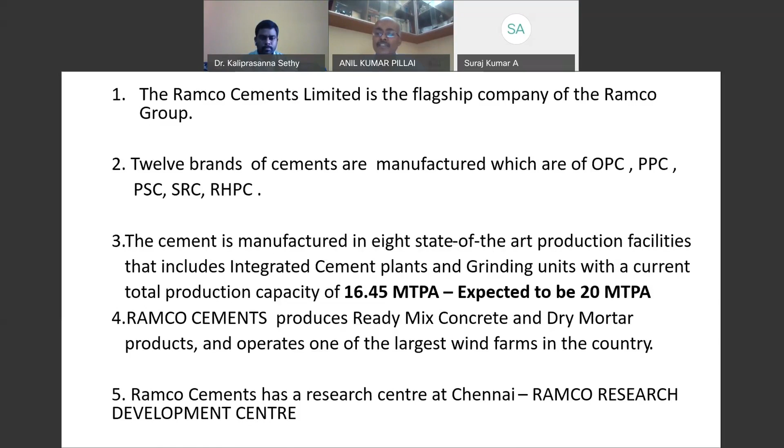So we have these different types of cement. Ordinary Portland cement, we have 4 types of cement. The Infra 43, Infra 53 grade is for those concretes which need longer slump retention time. We have the Super Fast for precast works. We have the PPC cement, Super Grade, Super Crete, Super Fine, Super Plus. Ramco Super Crete is one of those premium blended cements having a high rate of gain of strength as well as low heat of hydration.

We have the Portland Slag Cement, Ramco Super Steel, Ramco Samudra. We have the SRC cement, the Ramco Super Coast. So this is how we have the 12 types of cements which are there.

A wide array of customers that we have, from the individual householders, house builders, to large construction firms, Larsen & Toubro, which engages itself in construction of various types of structures, whether it be bridges, whether it is in the area of ports, and you will find that ITD Cementation also, they are into a lot of infrastructure works. So you will find that in each of these infrastructure works, we have different kinds of requirements. If suppose the durability requirement is for aggressive environment, we have a different type of condition that is there. So the concrete mix design has to be done differently.

When we talk about self-compacting concrete, we need to have a concrete which has to be without vibration. When we have precast concrete, we need to be very thorough on how to make those precast concretes at a plant, and then transport those precast items to the site. So there are so many challenges, so many different varieties of concretes that can be made at different sites based on the customer requirement, based on the aggressive conditions.

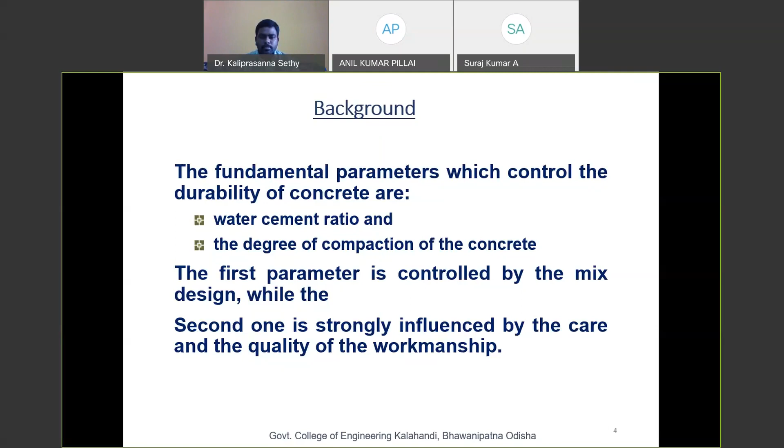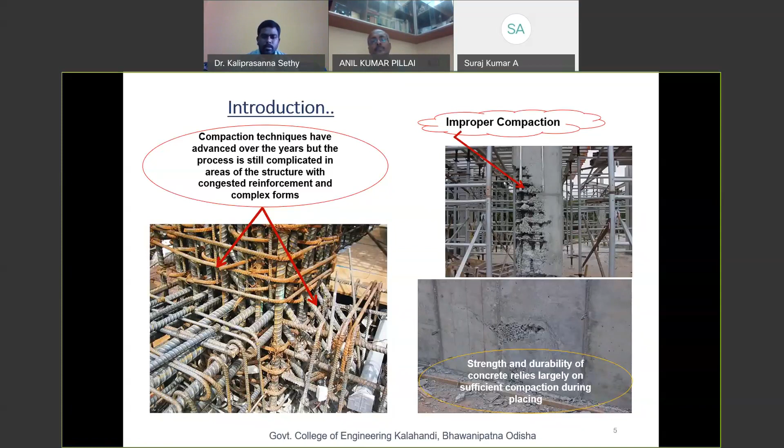So talking about self-compacting concrete, as the name suggests, it should flow under its own weight. In the year 1986, Professor Okamura at the University of Tokyo, Japan, developed this self-compacting concrete in order to satisfy the concerns regarding homogeneity, compaction, overall durability, and the lack of skilled labor. So this is the factor behind the development of self-compacting concrete.

And self-compacting concrete, as you know, is a highly flowable concrete, so it can flow under its own weight and yet is cohesive enough to be handled. And self-compacting concrete maintains its homogeneity without segregation. Though we are making the concrete flowable, there may be a chance of segregation, but we have to take care to avoid segregation.

And self-compacting concrete should be capable of filling every corner of the formwork. It should have very good passing ability, and it should pass along with the coarse aggregates through the reinforcement without blocking and without any external device for compaction.

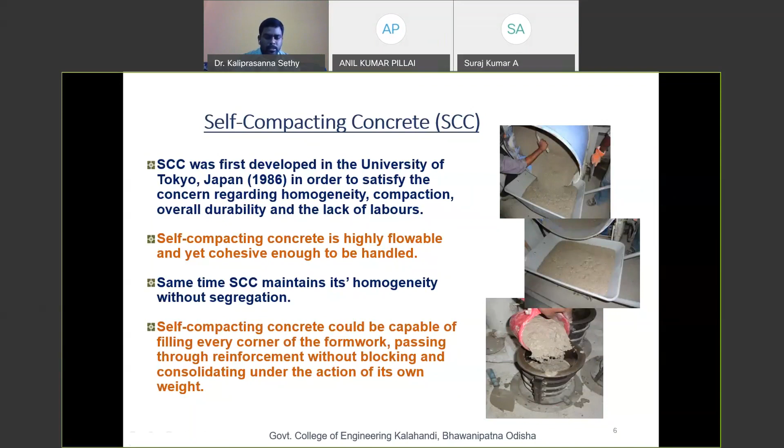And some superiority, I can say, some advantages of this self-compacting concrete over our conventional concretes. So it has faster construction quality, reduction in site manpower, though we need not go to the site with any vibration equipment.

Better surface finishes will be achieved, easier placing, improved durability, reduced noise levels, and a safer working environment, though we are not using any electrical devices for compaction, and reduction in the cost of concrete, though we are adding some external waste materials for the development purpose.

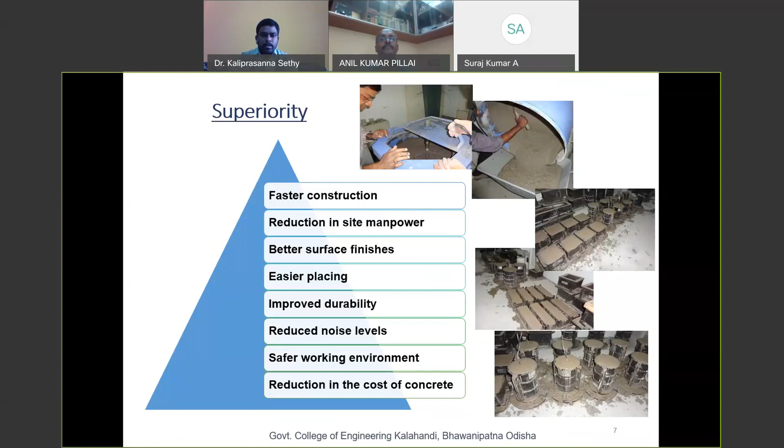And this is the structure mix proportion given by Professor Okamura in the year 2000. So he tried to give a tentative difference between our conventional and self-compacting concrete. As we know, for every design purpose, we have to assume 2% of air void to make the 1 cubic meter of concrete.

So that is there. And talking about water, water is 18% in both the cases, I mean in normal and self-compacting concrete. And in the case of self-compacting concrete it is mentioned as powder, whereas in normal concrete it is mentioned as cement, because we know it is a mixture of cement, sand, coarse aggregate, and water. But in self-compacting concrete we are increasing the powder content to achieve more paste.

So to achieve more paste, we have to increase the amount of cement. But if we increase the amount of cement, we may get a rich mix, and we may increase the cost of the concrete. That's why we try to use waste material, which is industrial slag, for the development purpose. And talking about sand, it is almost similar.

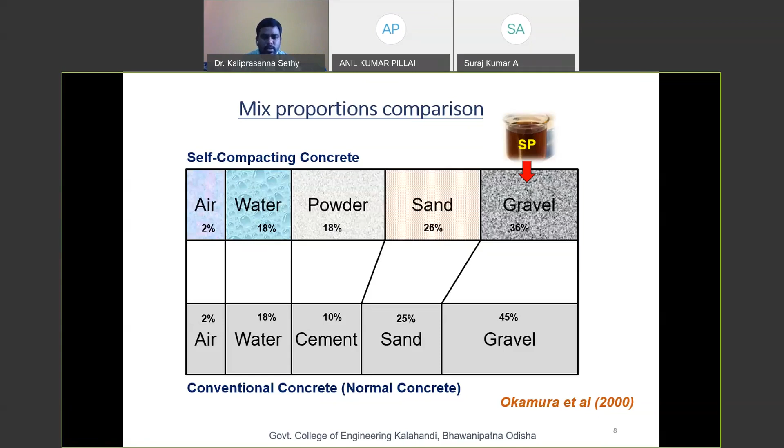And that is the beauty of this self-compacting concrete, you can say. So coming to the next slide. This is a project conducted at our laboratory, and for this project we have set our objectives: to develop a mix design methodology by incorporating slag into self-compacting concrete based on the efficiency concept, and to carry out experimental investigations on self-compacting concrete over the range of strength and percentage replacement levels, and the effectiveness of the proposed methodology in achieving the required strength.

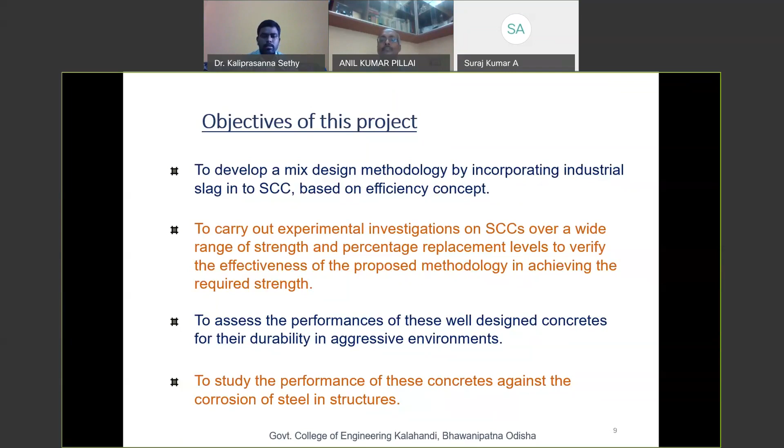The third objective is to assess the performance of these well-designed concretes for their durability in aggressive environments. Fourth, to study the performance of these concretes against the corrosion of steel in structures. With these objectives, we will go towards the materials and mix design methodology.

As we already discussed, we are using industrial slag here. So let me clarify the industrial slag. It is the byproduct from the iron and steel industry. That is granulated blast furnace slag, recovered by melting separation from blast furnaces that produce molten pig iron. Approximately 290 kg per ton of pig iron is generated. So it is available in very huge amounts, freely. So we can utilize this waste for the development purpose without any hesitation.

And you can see the chemical composition of cement and this slag. It contains almost similar silica content as cement, and the Blaine surface area is 370 square meters per kg for cement, whereas the industrial slag we used here has a surface area of 430 square meters per kg. So it is finer than the cement which we have used for the design of self-compacting concrete.

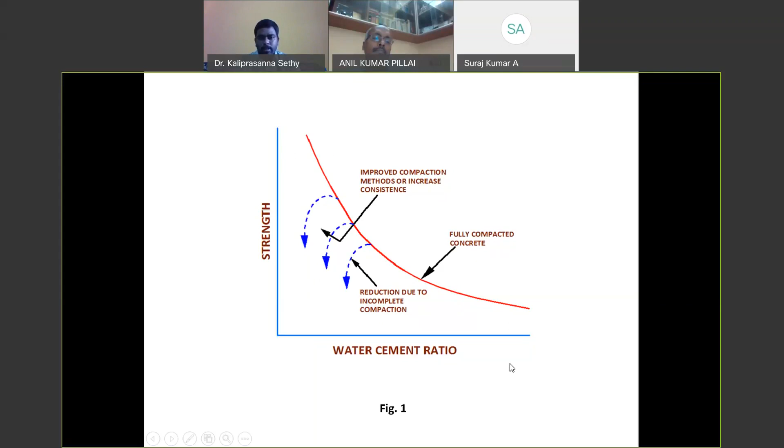But at the time of placing the fresh concrete at the site, in the formwork, if we don't take care of the compaction, it may drastically reduce this. You may not find the curve in this position; it will drop to this position, and the strength and water cement values will be different from what you achieve for fully compacted concrete.

Also, in conventional concrete, the water content is fixed based on the maximum size of aggregate, around 186 for 20 mm aggregate, and aggregate grading. In the case of self-compacting concrete, the total fines, meaning the powder content, is of importance. First we have to fix the powder content, then proceed to the other materials. In view of this, step 1 is fixing the total cementitious or powder content for SCC. We have fixed the total cementitious material at around 550 kg per meter cube.

In the previous slide I had shown you that... I think these switches are not working for my system. Slide is not moving, is it? Slides are moving, but it is not going back. Oh, is it? Uncheck that share content and check it again. So should I stop sharing? Stop sharing and then start sharing again; then it will be all right. Okay, thank you. You want to go back, is it? Yeah, it is fine now. Thank you.

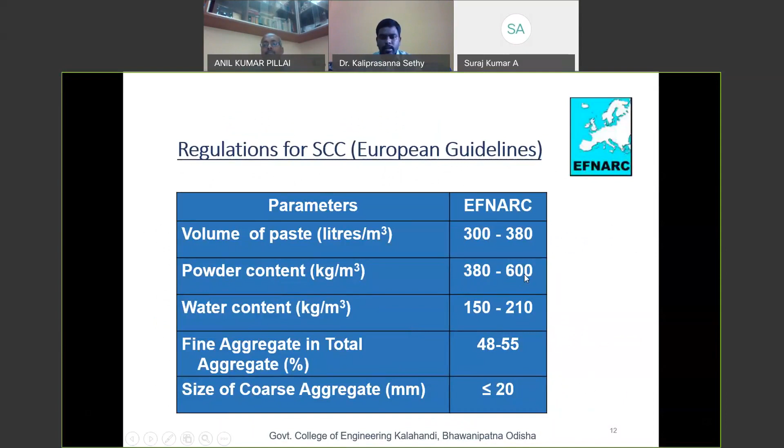From the EFNARC guidelines, the powder content has to be set between 380 and 600. Based on this, we have set our powder content as 550 kg per meter cube, which is why we chose these parameters from the EFNARC guidelines. In the next step, once we fixed our powder content, we fixed the percentage of industrial slag and calculated the efficiency also.

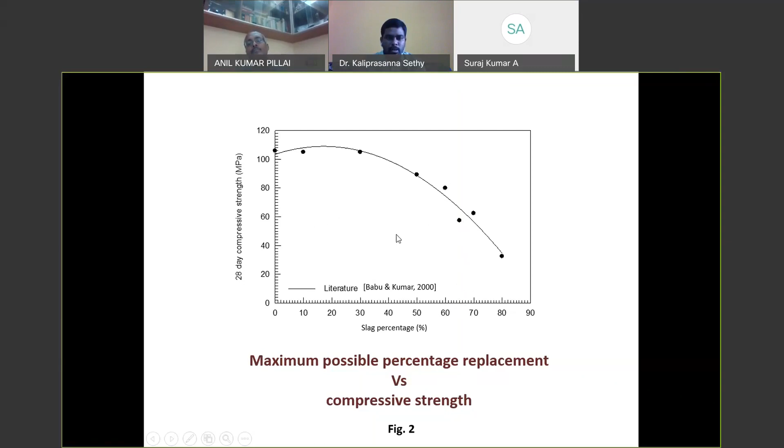From earlier research, it is known that for normal slag concretes, the slag content can be varied from 10 to 80%. Here is the diagram given by Babu and Kumar in the year 2000, plotted between slag percentage and 28-day compressive strength, showing the maximum possible percentage replacement for a given compressive strength. If anybody wants to design an M60 concrete, from this curve you can find the corresponding slag replacement, around 60 to 65%. According to this curve, we set our slag replacement, and for self-compacting concrete the same concept is extended.

Like in this procedure, the 28-day efficiency factor, so I'm talking about efficiency. The efficiency factor, that is the K value, is defined as the portion of the pozzolanic material. The pozzolanic material we are using here is slag. So it is defined as the portion of pozzolanic material like slag or fly ash, etc., that can be considered equivalent to Portland cement. So a value of K equal to 1 indicates that, in terms of compressive strength, the pozzolanic material is equivalent to cement.

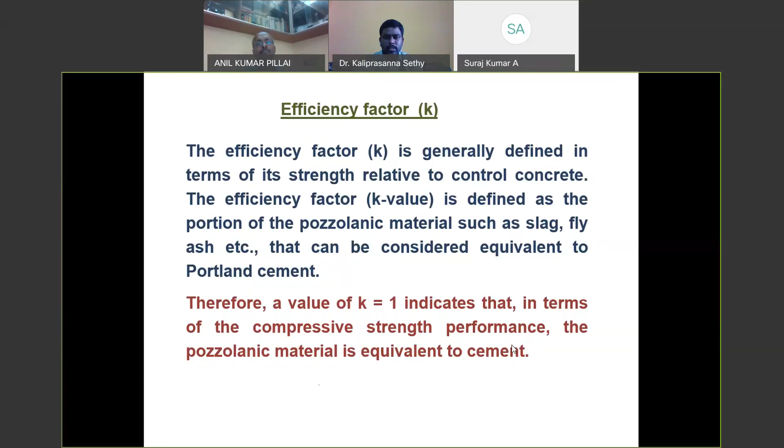So once we fix the slag percentage based on the efficiency method, we go to the third step, that is calculation of water content in self-compacting concrete. The quantity of the slag is multiplied by the K value to estimate the equivalent cement content, using the modified ACI relationship, that is water cement ratio. This is the modified ACI curve plotted between water cement ratio and 28-day compressive strength. In conventional concrete we are using only cement, so it is on water cement ratio.

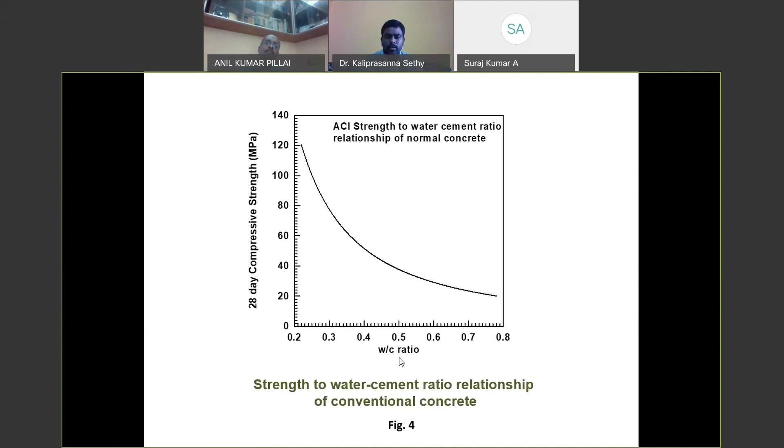But in the case of self-compacting concrete, instead of cement we are using cement plus slag, and with the efficiency factor concept, we have to make the slag equivalent to cement. So here is the formula, W/(C + K×G), where K is the efficiency factor applied to your slag. To make the slag equivalent to cement, we made this, and this is the water cement ratio for our self-compacting concrete.

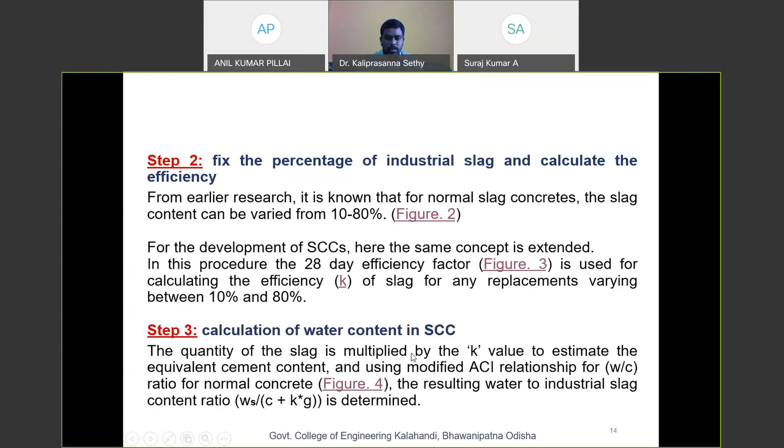And in step 4, we determined the coarse and fine aggregate content. It is now possible to assess the total aggregate content according to the absolute volume method. Like in conventional concrete, the fine aggregate content in the total aggregate is generally recommended to be in the range of 48 to 55%, as already shown in the table. And the proportioning is based on the continuous grading curves. From these grading curves, you can see the gradation of the aggregates we have used for the development of normal and self-compacting concrete.

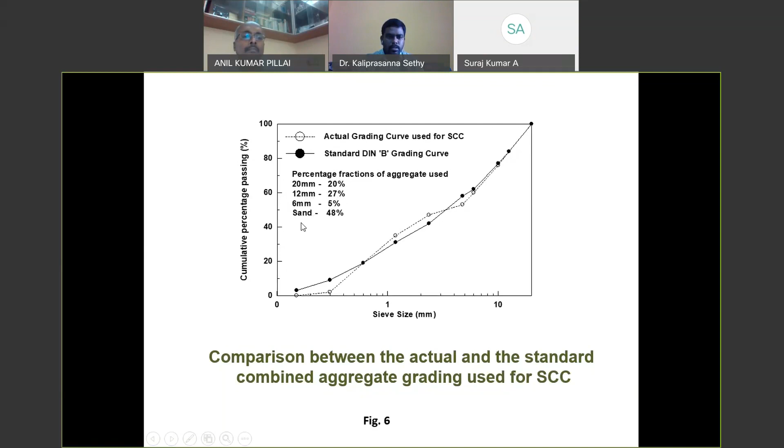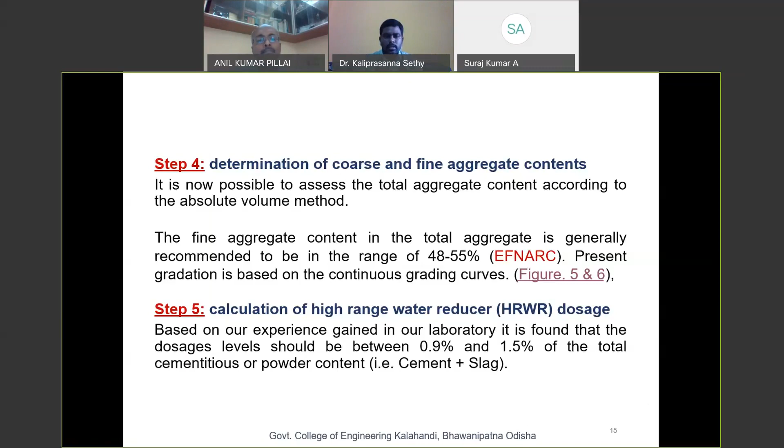After fixing all these materials, we have to select the superplasticizer, that is high range water reducer, dosage. Based on trial and error in our laboratory, we found that the dosage levels should be between 0.9 to 1.5% of the total cementitious powder content, that is cement plus slag. And this is all about the mix details, and based on these mix details, we set out the flow chart.

We selected materials, checked the strength selection, fixed the total cementitious materials, and with these flow charts, we came up with trial mixtures, which we tested as fresh mixes in our laboratory. Once we get satisfactory results for the fresh concrete, we can finally go for the development of self-compacting concrete. If they don't satisfy, we have to redesign the concrete.

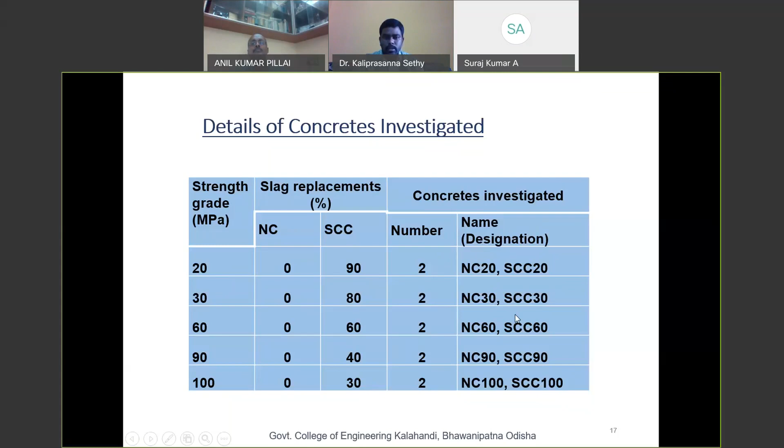And these are the details of the concrete investigated for this project. You can see strength grades of 20 to 100 MPa we have designed for both normal and self-compacting concrete. For 20 MPa concrete we have replaced slag up to 90%, whereas for 100 MPa we have replaced slag up to 30% only. The concretes developed here are designated as NC and SCC.

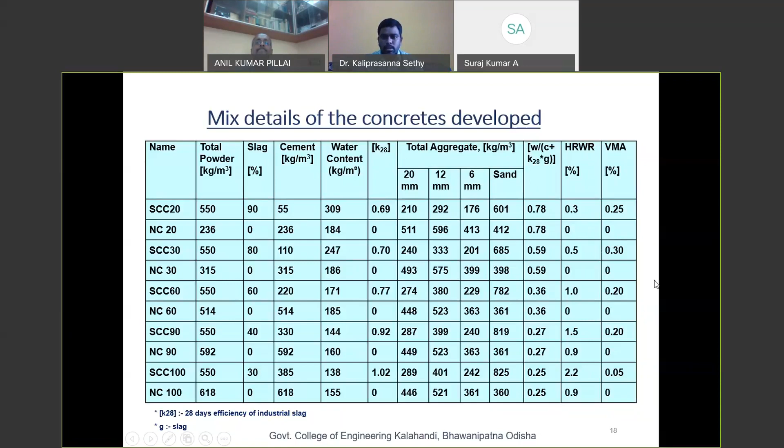This is the superplasticizer and VMA dosage which we have used for this self-compacting concrete. Once we decided for development of self-compacting concrete, we have to go for fresh mix testing.

For conventional concrete, we have tests like slump cone test, VB test, and flow table test, from which we can check the fresh property of conventional concrete. But in the case of self-compacting concrete, the matter is something different.

We have to go through certain tests provided by EFNARC guidelines. Since we are developing flowable concrete, we have to check the flowability, as well as the viscosity and the passing ability. For all these things, we have to conduct certain tests like flowability, viscosity, and passing ability tests.

Flowability is nothing but the ease of flow of fresh concrete when unconfined by formwork or reinforcement. Viscosity is the measure of a fluid's resistance to flow. Passing ability is the ability of fresh concrete to flow through tight openings, such as spaces between steel reinforcing bars, without segregation or blocking.

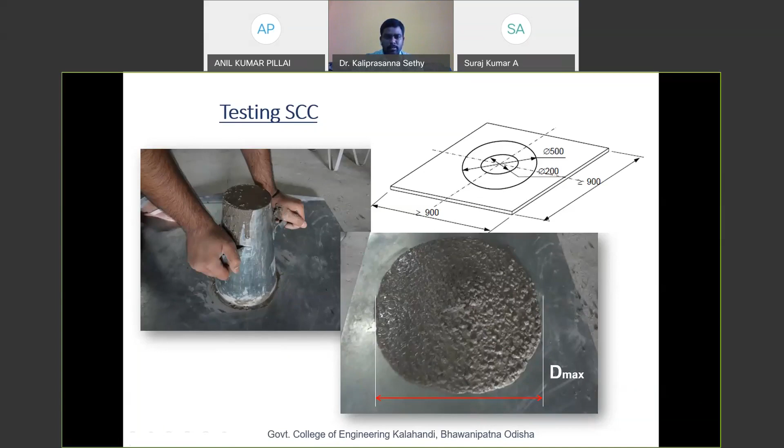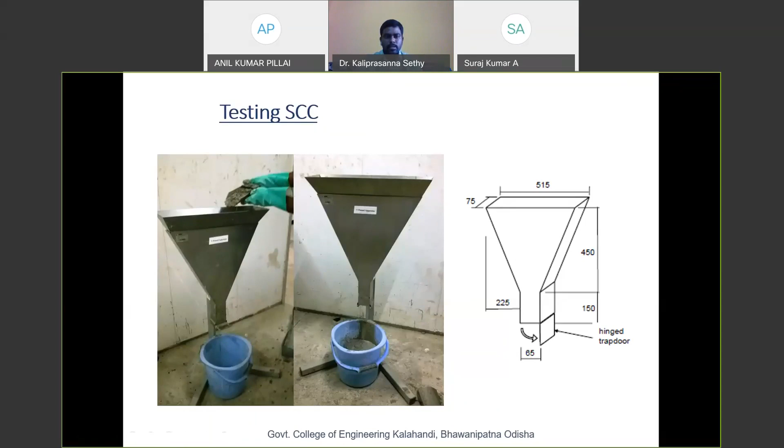Once we remove the trap door, we take the reading of the flow time, meaning how much time it takes to get empty from the V-funnel into this bucket. There is a range given in the EFNARC guideline, and from that guideline we can certify this concrete as self-compacting concrete.

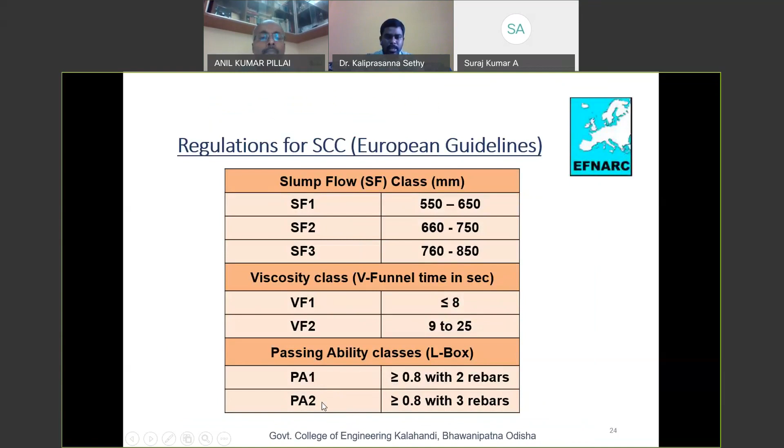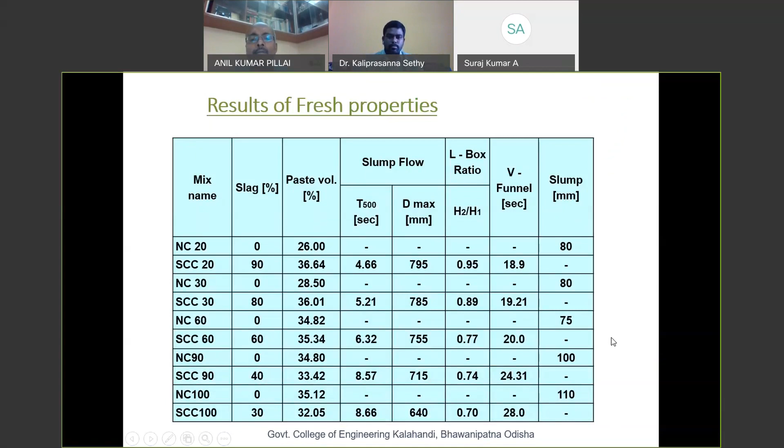So once we certify the concrete as fresh, meaning as self-compacting concrete, we can move towards the mechanical property check.

And though we are developing flowable concretes, there may be a chance of segregation, and there may be a chance of settlement of the coarser aggregate at the bottom of the frame structures or mold.

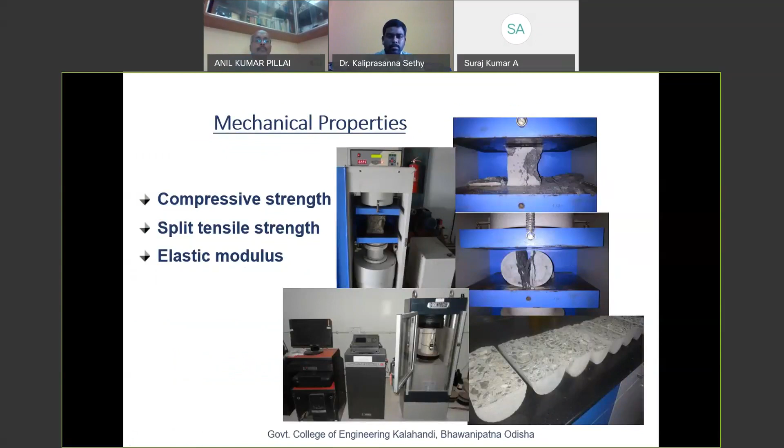So with this we'll move towards our mechanical properties like compressive strength, splitting tensile strength, and elastic modulus of the developed concrete. Here is the graphical formation of the observed results which we obtained by using the CTM machine for compressive test.

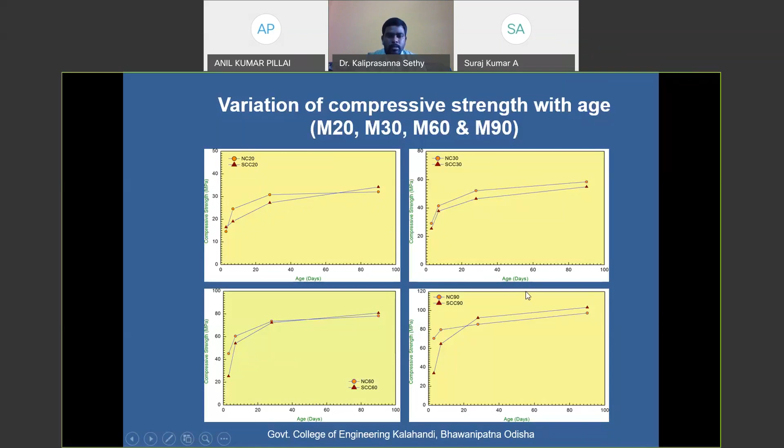This is the curve plotted for 90 MPa concrete. So here the strength which we found is nearby 100 only. We didn't get a much higher value for this, but we achieved what we designed for, that is nearby 100 MPa.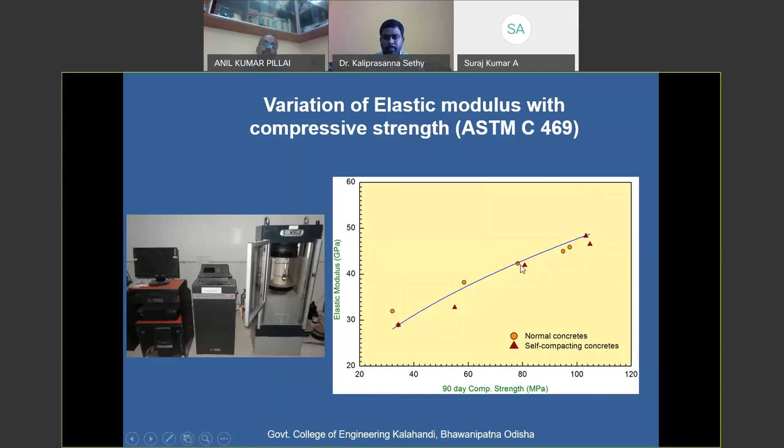And here is the strength characteristics which we found for our strength by using the CTM machine. From this you can see there is a very negligible or minimum deviation for all the samples which we have tested for the compressive strength.

And here is the other mechanical characteristics which we have investigated in this project, that is NDTs like rebound hammer, ultrasonic pulse velocity test, splitting tensile test, and modulus of elasticity test. You can see all the values of 3, 7, 28 and 90 days of this rebound hammer test. We are achieving very good results, similar to the result which we obtained using the CTM machine.

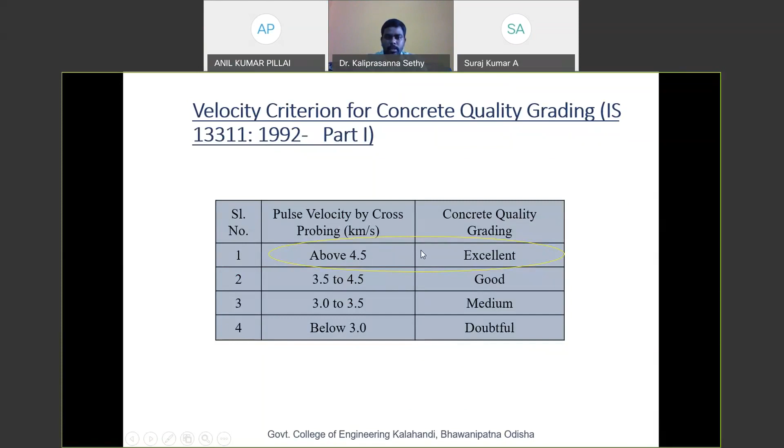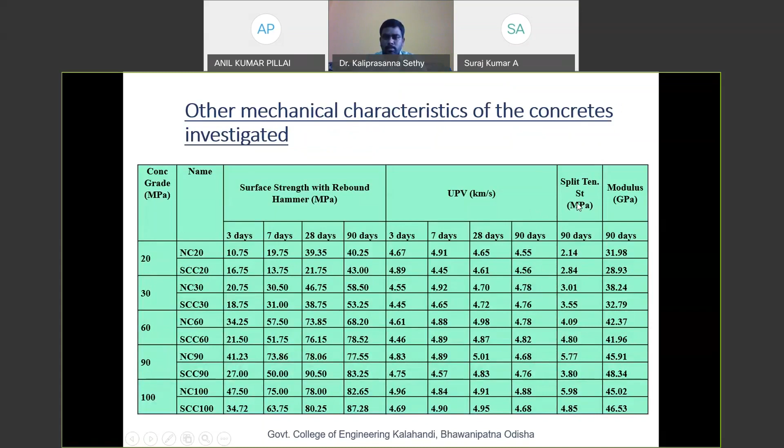And UPV also giving a 4.5 value at 90 days. If you check the IS standard, IS 13311 1992, as per this standard, if the pulse velocity readings are more than 4.5 kilometer per second, the concrete will be categorized as excellent concrete. So you can see from this result, at 90 days strength we are achieving more than 4.5, that means we are getting a very good concrete. And this is the results of split tensile and modulus test.

So here is the autogenous shrinkage. As you know, autogenous shrinkage is nothing but the uniform reduction of internal water due to hydration of cement when it contacts with water. This is particularly considerable in the case of high strength concrete, where we use more quantity of cement.

So for that, though we are trying to develop high strength concretes like 60, 90 and 100, we have planned for this autogenous shrinkage test. For this we prepared the samples as you can see from the figures. These are the samples for autogenous shrinkage test, with prisms of 7.5 by 7.5 by 28.5 centimeter.

Now we have coated the samples with wax, and further it is wrapped with aluminum foil, and both sides of the prisms are fixed with steel balls of 6 mm for taking the calculation of the height reduction or the shrinkage volume by using this length comparator.

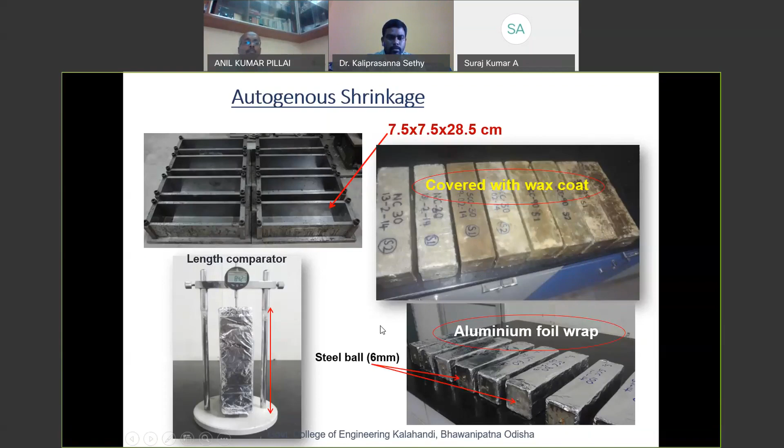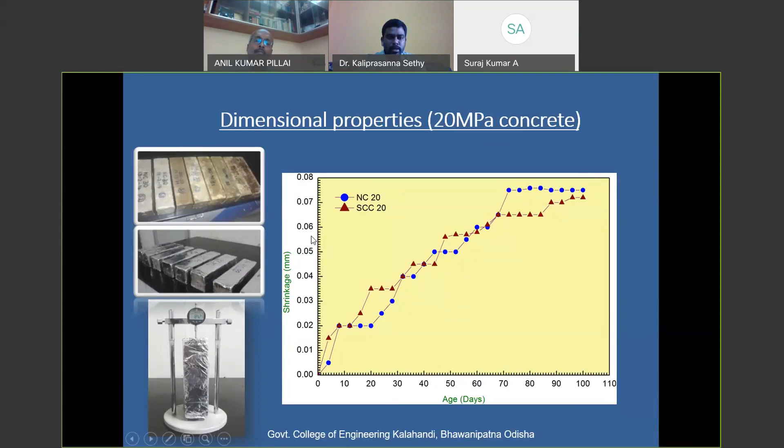So you can see it is very negligible, a very negligible amount of shrinkage which we obtained from this study. This may be due to the fines content in the high strength concretes which we developed, as we already discussed that the slag which we used is finer than our cement. So that may be due to that effect.

And this is the bar chart of the same values, for easy understanding. So the maximum shrinkage value we obtained is 0.16 or 0.17.

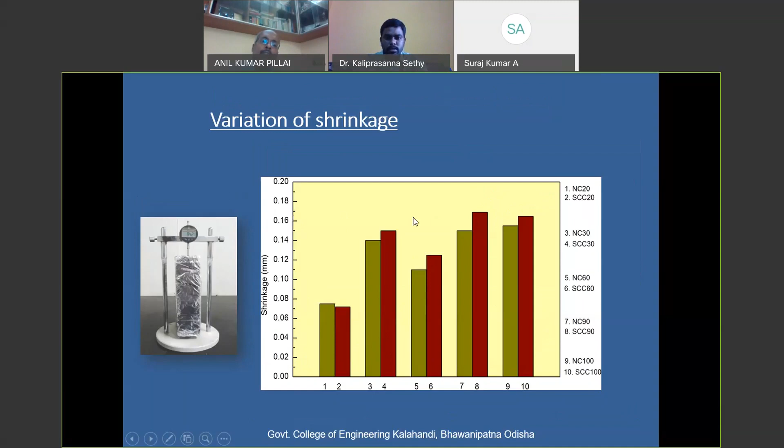Once we finished the mechanical property characterization, having justified the mechanical characteristics, we had to go for the performance characteristics, for which we tried to develop the durability characteristics of this concrete. For that we conducted a number of tests: for durability purpose, direct permeability test, water absorption test, acid attack test, and sulfate attack test. And for corrosion characteristics, we performed resistivity studies, alkalinity of concrete (pH value), chloride diffusivity studies, carbonation, and finally we also went for corrosion rate analysis.

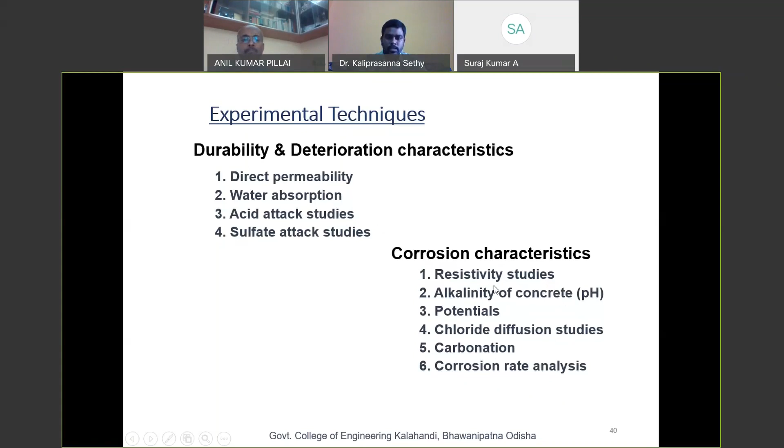So here is the test performed by this German water permeability testing apparatus. As you know, durability is highly influenced by permeability - the ingress of external aggressive ions is what affects your concrete. So we have to take care of our concrete by checking all the parameters like permeability. For that we conducted this German water permeability test, as you can see from the diagram.

There is a base plate with solid support and clamps which tighten the 15 by 15 centimeter cube block, and with a particular pressure, water is injected into the concrete. Readings are taken at 2-minute intervals up to 30 minutes, and then 5-minute intervals up to 1 hour. With the help of Darcy's law, we calculated the coefficient of permeability for this concrete.

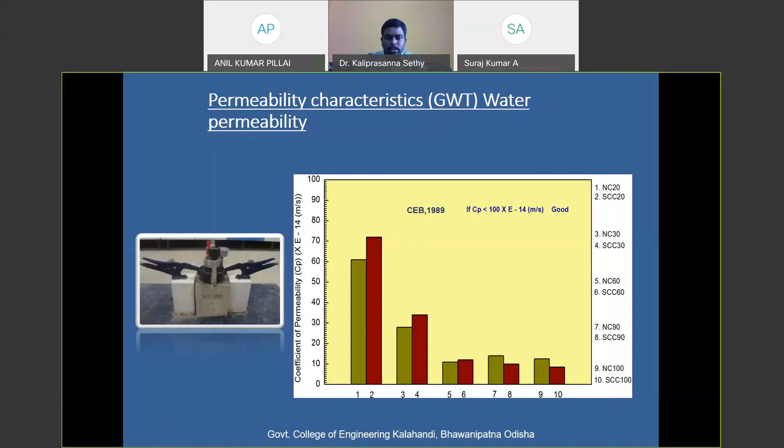This is another permeability apparatus to ensure more about the permeability. We conducted another test for permeability characteristics as per DIN 1048 part 5. You can see at a time we can check 3 samples. With 5-bar pressure, we fixed the samples in this apparatus and kept them for 72 hours, and the pressure drop was checked throughout the process. After 72 hours we took the samples from the apparatus and broke them.

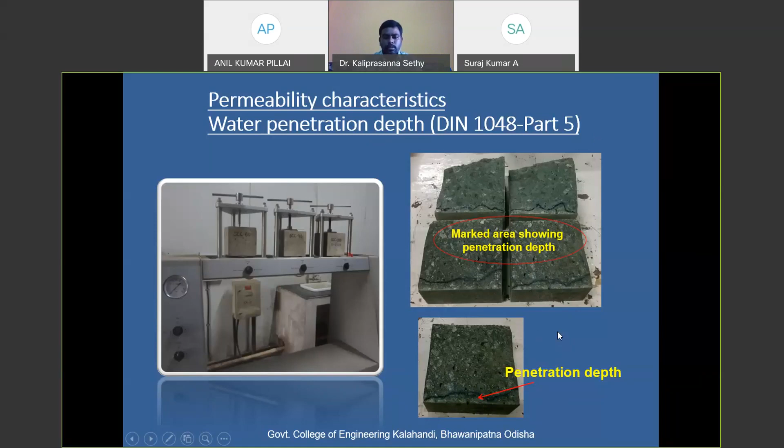Immediately after breaking the sample, we mark the samples using this highlighter, because the permeability depth may vanish due to evaporation. So using a scale, we took the readings of these concretes. Here is the permeability depth we observed from the test, taking the average from all the concretes - maximum we observed is 4.5 mm. This is a very negligible depth if you consider the cover of the concrete, which is around 25 to 50 mm. So it is categorized as having good resistance to permeability.

And here is the absorption test. We conducted absorption tests for all these concretes, using the standard procedure. As per the ASTM standard, we conducted this absorption test, and here is the value plotted between time in hours versus absorption percentage.

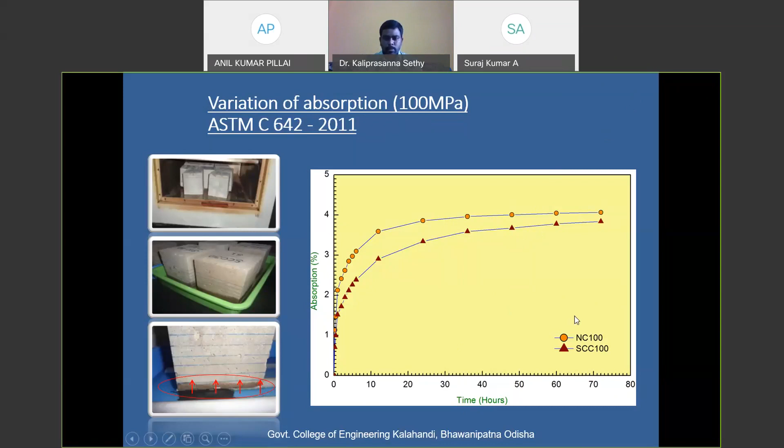Up to 72 hours we have taken the readings, and we observed the trend curves like this. So the maximum percentage we found is 4 for M100, and for other concretes it is also showing a very low absorption value. Like you can see, the maximum value is 6 for normal concrete, and for self compacting concrete it is less than normal concrete.

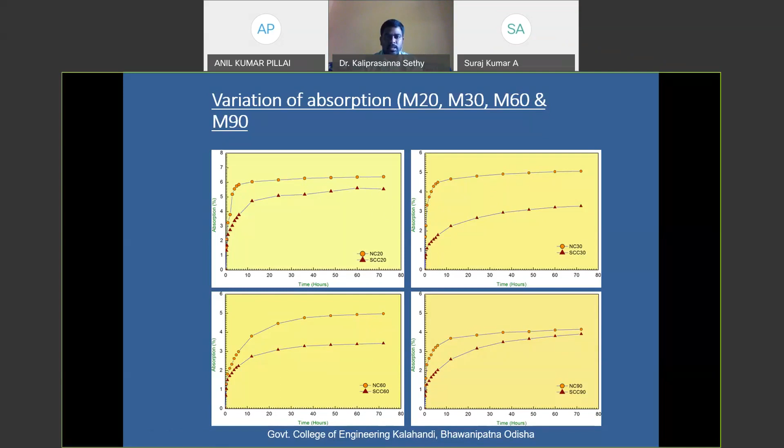For all the cases you can see, we found the self compacting concrete is showing a much lower absorption value than that of normal concrete. It might be due to the fine contents in the self compacting concrete.

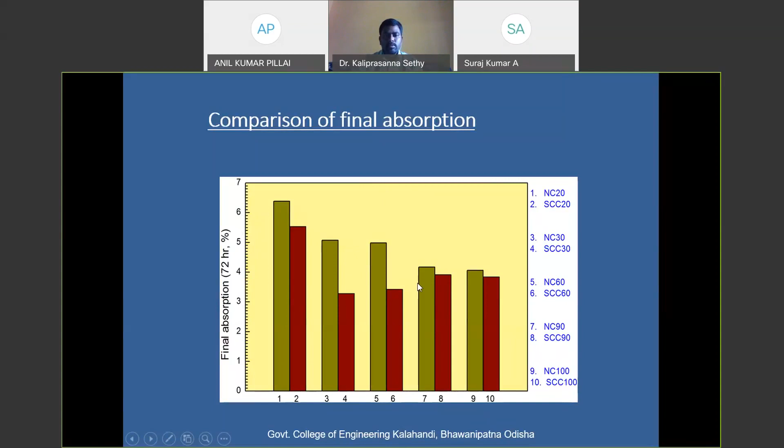And this is the comparison of final absorption, plotted for 72 hours. So at 72 hours, we get a maximum of 6.5 percentage absorption value for M20 grade concrete. Here is the table for all those characteristics which we have found in the earlier slides.

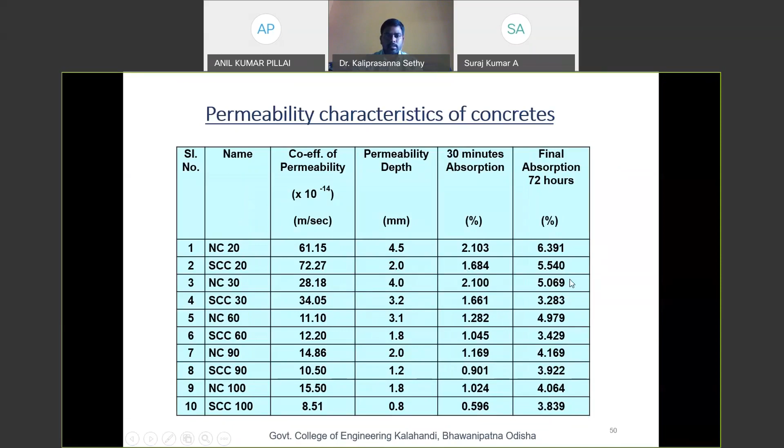And coming to the acid attack studies, concrete might be made for any chemical industry. So the surface or the floor of the concrete may directly come in contact with acids, sulfates or chlorides. So for that we have checked the concrete for acid attack. And since this is a long-term process, we tried to accelerate it by using a 3% H2SO4 sulfuric acid solution for this test.

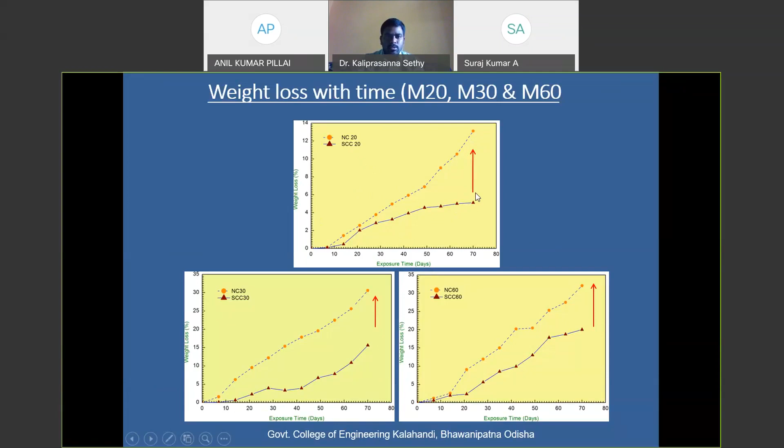And every 7 days we repeated this, and we obtained the weight loss values for all the normal and self-compacting concretes. So here is the graphical representation of exposure time in days to weight loss of the concretes. You can see for all the cases, self-compacting concrete has much less weight loss compared to the normal concretes. And in the case of high strength concrete, that is M90 and M100, both the self-compacting and conventional concrete are showing almost similar weight loss.

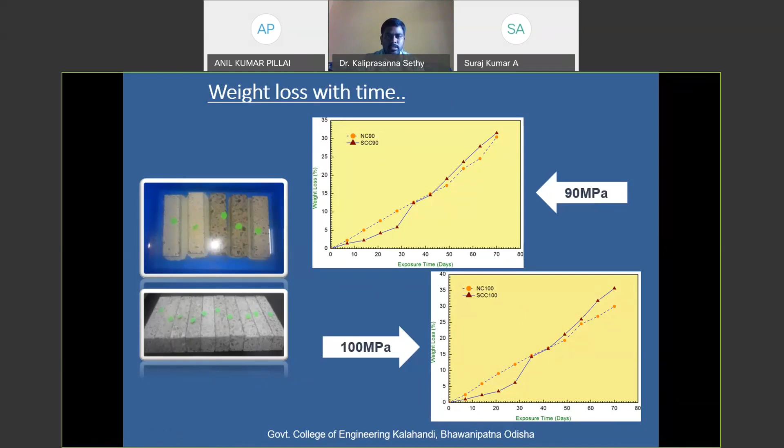It may be due to the presence of more cement content in the high strength concretes. So that is the result of this. But still we can say that self-compacting concrete has very good resistance to acid attack, and you can see that from the diagram itself.

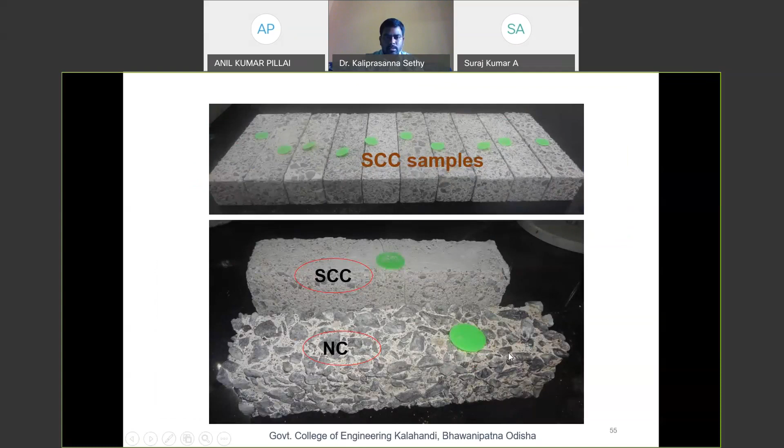So this is how leaching takes place in the case of normal concretes and self-compacting concretes. After cleaning the concretes, we found them like this. This is the self-compacting concrete sample, and here are the normal concrete samples. So you can imagine the deterioration in quantity in the normal concretes. And these are the test results starting from 7 days up to 70 days.

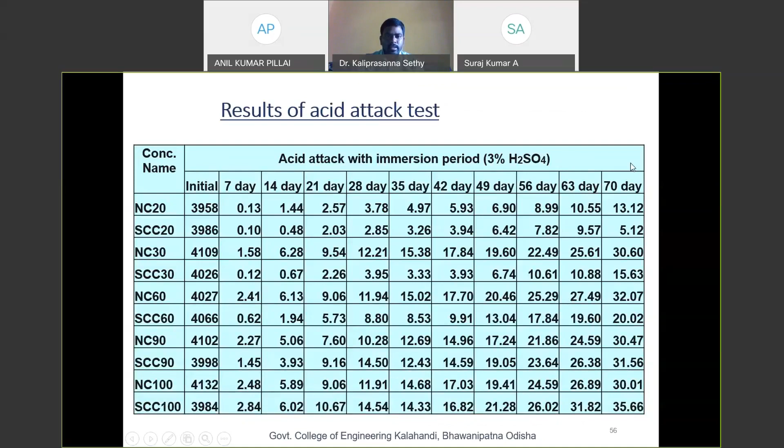And talking about sulfate attack studies, this is also a similar procedure. We check the concrete on alternate cycles of 7 wetting days and 7 drying days, and to accelerate the procedure we used a 15% MgSO4 solution, and we found results similar to the acid attack values. For all the low strength self-compacting concretes, we found very low values compared to normal concretes. Whereas in the case of high strength, the values are almost similar to the normal concretes.

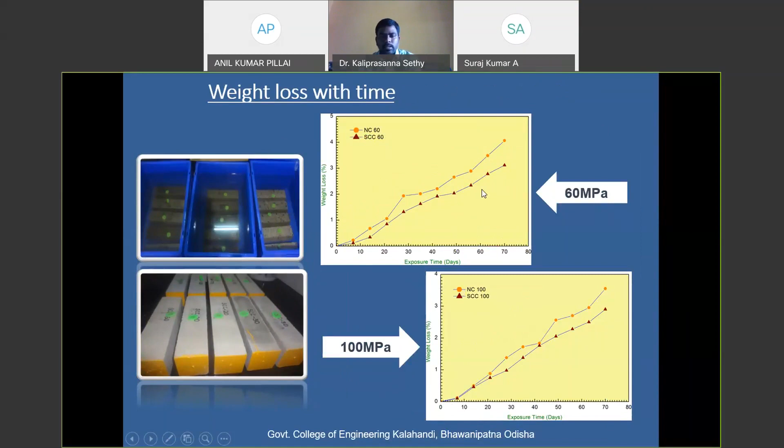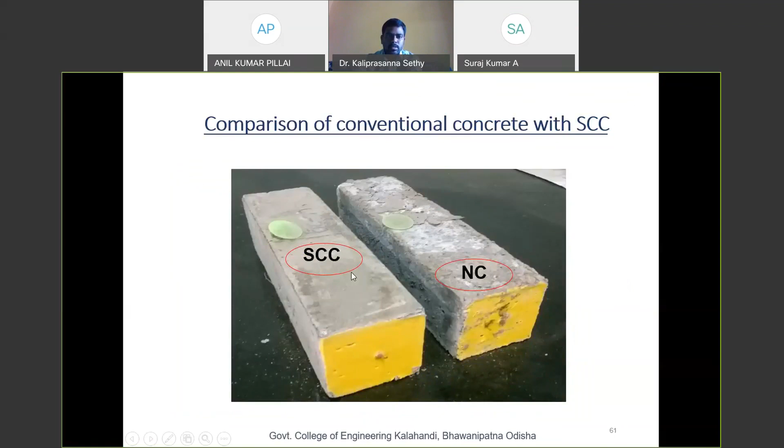These are the samples we obtained after testing; this is the sample of self-compacting concrete, and this is the sample for normal concrete. You can see spalling took place in the case of normal concrete, and the weight loss observed in the normal concrete is more than that of self-compacting concrete. Here are the test results.

Corrosion characteristics. This is the final parameter which we have checked for in this project. The concrete is a reinforced cement concrete. Though the concrete has reinforcement inside, if chloride ingress is there inside the concrete, there may be a chance of corrosion. Corrosion takes place in the reinforcement. For that, we have conducted certain tests to check the corrosion resistance, and here is the resistivity test which has been investigated in this project.

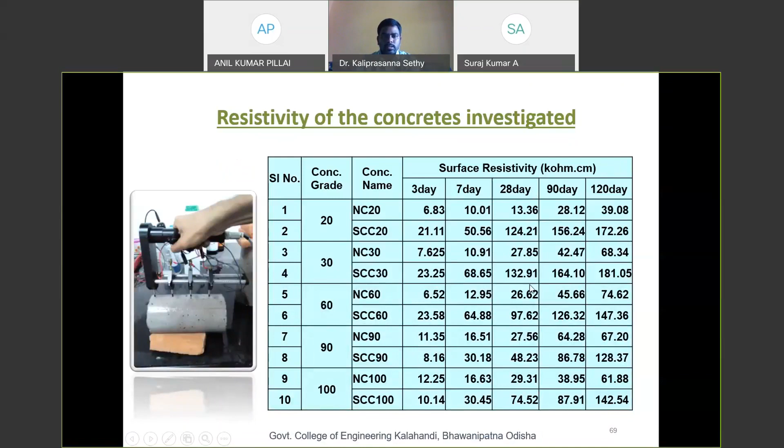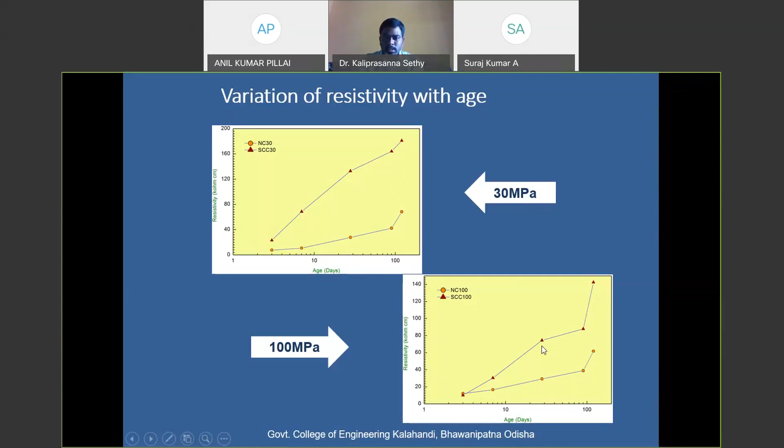So let me show you the values first. These are the readings taken at 3, 7, 28, 90 and 120 days for all the normal and self-compacting concretes. Here is the graphical representation of the results plotted between age and resistivity. All the self-compacting concretes are showing very good resistivity results compared to our normal concrete. And here also for all the cases we are getting a very good resistance towards chloride ion penetration.

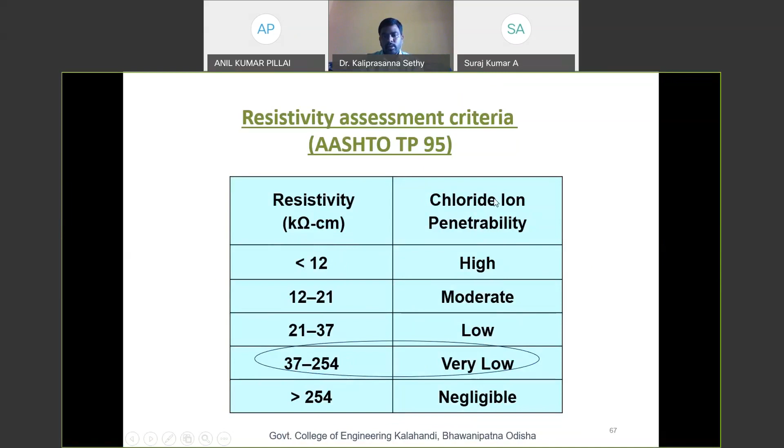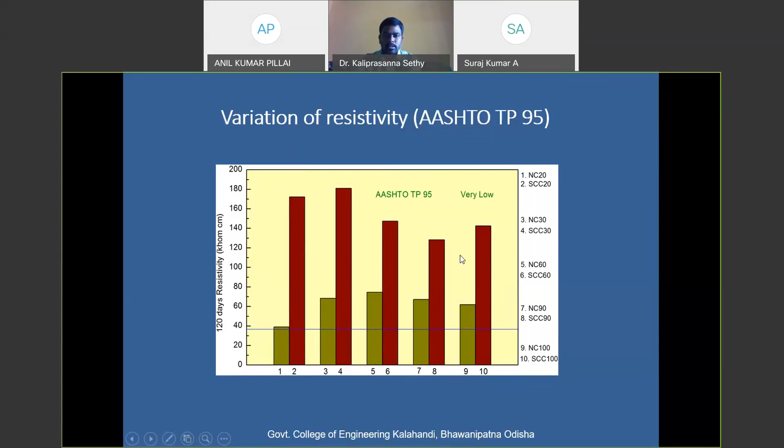I'm going a bit faster because the time is already 12:15. Hello, sir. How many more slides? I have 10 to 15 more slides. I will complete within 15 minutes. Okay, because we need to take some questions also. That's why. Sure, please. Sure, sir.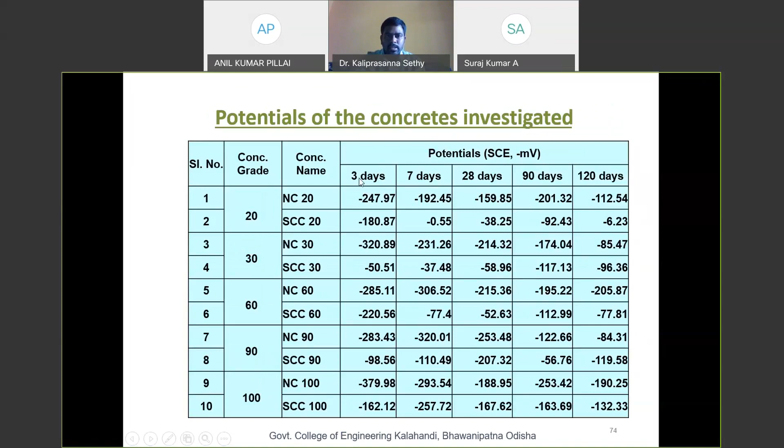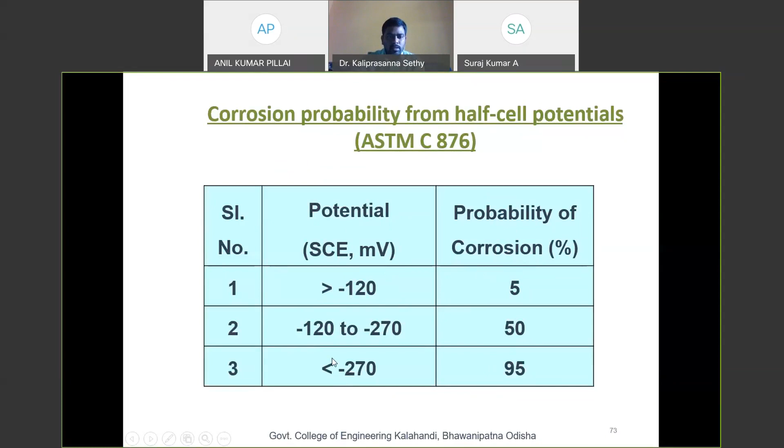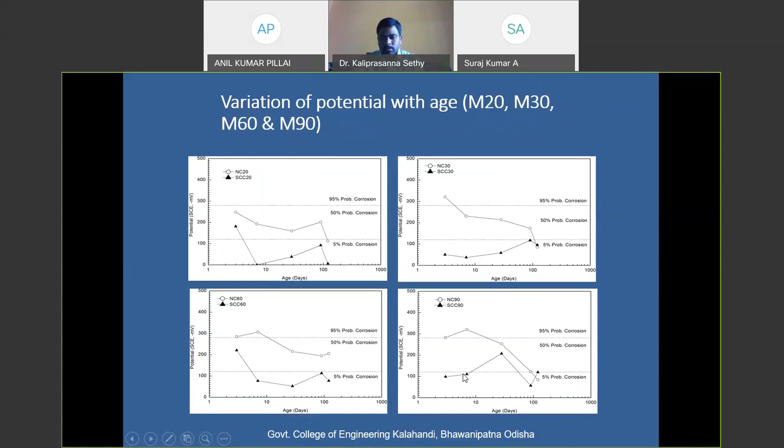This is the alkalinity or pH value we have tested for this developed concrete. As you know, if the pH value is more in your concrete, the more will be the passive layer, which is a protective layer to your reinforcement to avoid corrosion. So we have checked the 90-day pH value of all our samples. These are the results. We took the core of the cubical samples, ground it to 300 micron, mixed it with distilled water, and using a digital pH meter we tested all these samples for pH value, and you can see all the values.

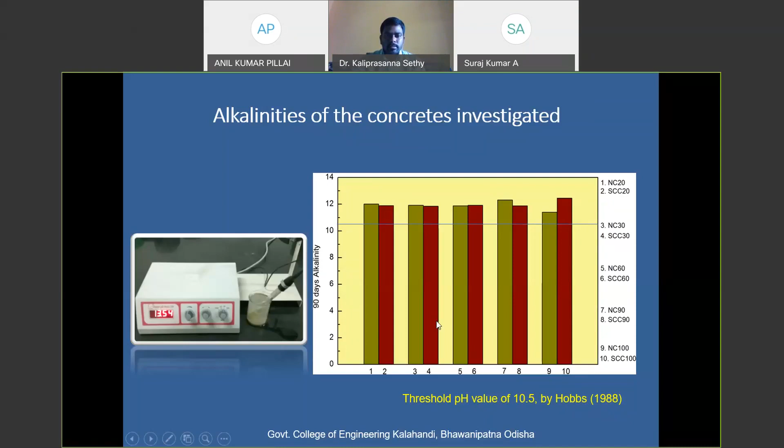So next is our chloride diffusivity test, which is for concrete. You can see the samples. This is the sample taken from a 10 by 20 centimeter cylindrical sample. This is the core, and the core of the sample is taken for this chloride diffusivity test. And the periphery of the sample is coated with enamel paint to ensure that the solution does not go out this way.

And this is the lab setup for this chloride diffusivity test. You can see there are two reservoirs. One is containing NaCl solution and another is containing NaOH solution. By allowing the current to pass through, we charge the ions and try to attract the ions to each other. And by using this data logger, we record all the charge passed through it. And from this, we calculated all the chloride diffusivity values.

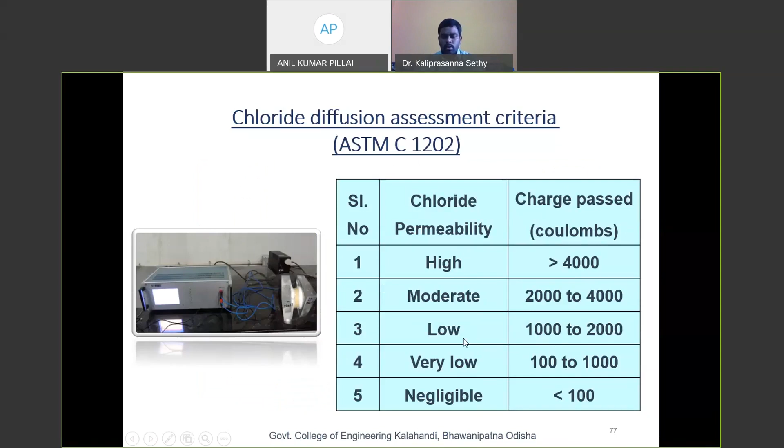And here the results are plotted as a bar chart, and you can see the maximum chloride diffusivity values in coulombs are around 2000 to 2500. As per the ASTM standard, if it is between 100 and 1000 coulombs, the chloride permeability will be very low; 100 to 1000 is very low, 1000 to 2000 is low. So from this you can see it is falling under the low to very low category.

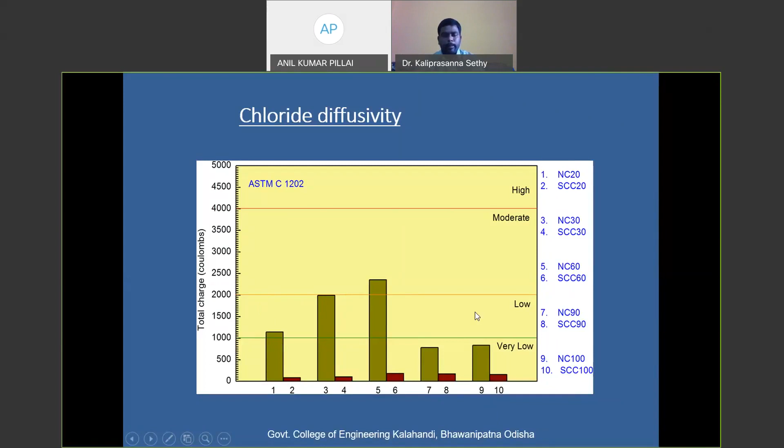Here is the carbonation of the concretes investigated. For carbonation, we exposed the concretes we developed for 1 year in the atmosphere, on the top of the roof, allowing direct sunlight and rain. After 1 year, we took the samples, broke them, and put phenolphthalein solution on them, which is the indicator of carbonation.

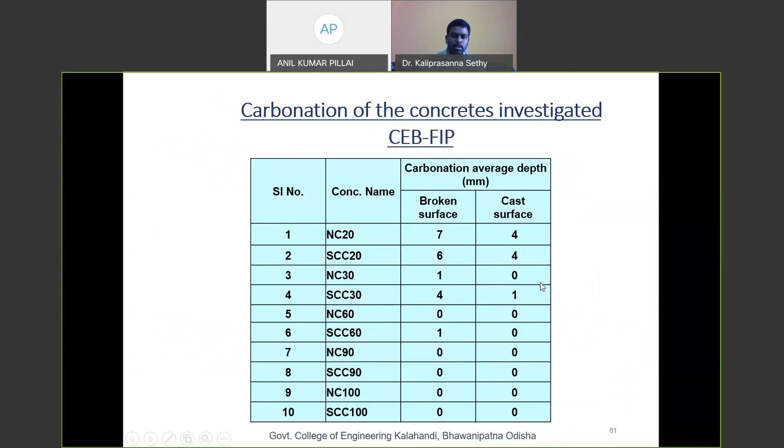From this diagram, you can see the color changes to pink. This is the unaffected area, and the parts showing no change of color are the affected area. Here are the samples we tested, and these are the readings we observed after applying the phenolphthalein solution. Almost all the samples show zero or very low values, and some show 7 mm, which is negligible. So you can say it's a very good resistance concrete.

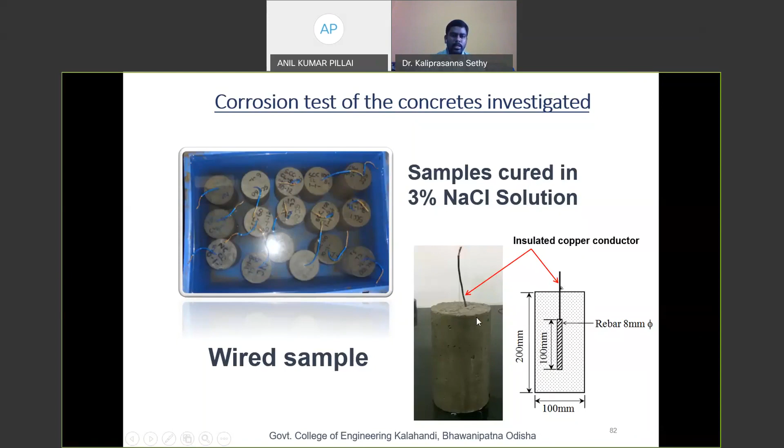Coming to the corrosion test of the concrete investigated. In this case, the sample preparation was a very challenging task for us, because we had to keep an 8 mm rebar exactly at the middle of the sample. You can see from this schematic diagram that this 8 mm bar has to be connected with insulated copper wire, and the sample has to be placed inside the chloride solution.

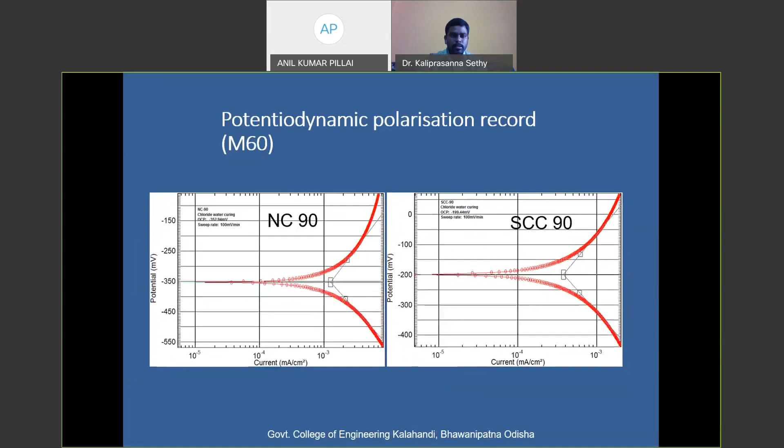Using this ACM device, a fully computerized device, we tested the corrosion, and by the potentiodynamic polarization technique we obtained these graphs between current and potential. These graphs were observed from the digital analyzer of the ACM Gill corrosion equipment, and this is all the data obtained, the rest potential and corrosion potential. From this we calculated the corrosion rate, that is the mils per year value.

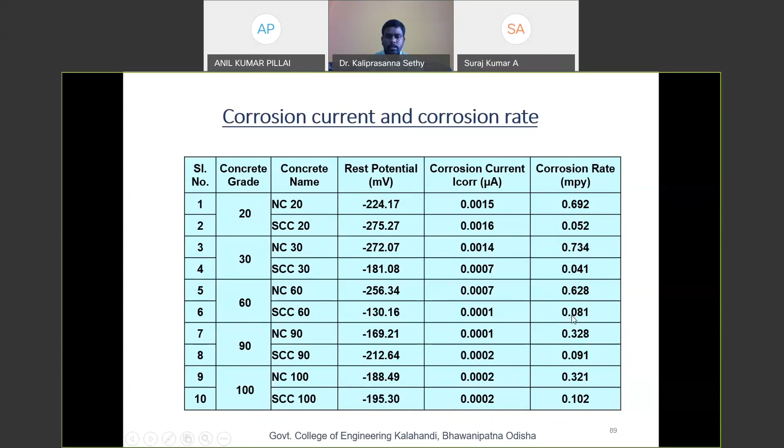As per Tulini et al. in 2004, they suggested that if the corrosion rate in mils per year is 0.2 to 0.4, it is moderate, and less than 0.2, it is low. So you can see it is 0.2 to 0.4, falling under moderate, and the high strength concretes are showing low corrosion rate as per the equipment.

And this is the summary based on the work conducted in our laboratory. We can conclude with these points: a new mix design methodology was developed in this project that accounts for the efficiency of industrial slag in self-compacting concrete for a specified range of 20 to 100 MPa, while specifying limits to the paste, water and fines contents.

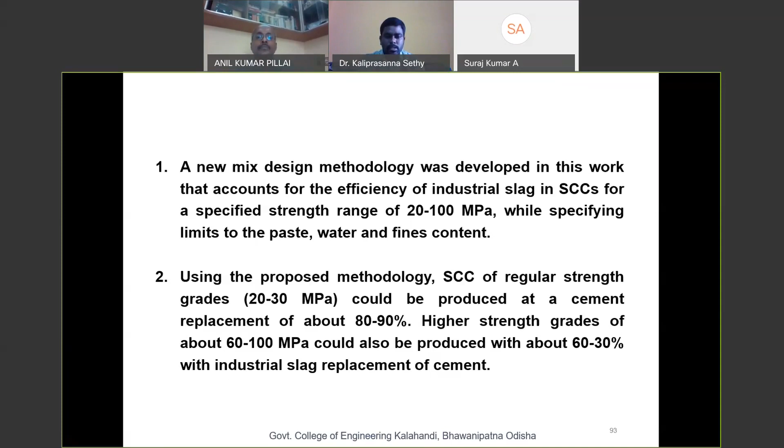Using the proposed methodology, self-compacting concrete of regular strength, 20 to 30 MPa, could be produced at a cement replacement of about 80 to 90%, and higher strength grades of about 60 to 100 MPa could also be produced with about 60 to 30% industrial slag replacement of cement. The permeability coefficient values of the developed self-compacting concretes are found to be good based on the assessment criteria provided by the Concrete Society, and the resistance of self-compacting concrete against chemical attack was found superior compared to normal vibrated concretes.

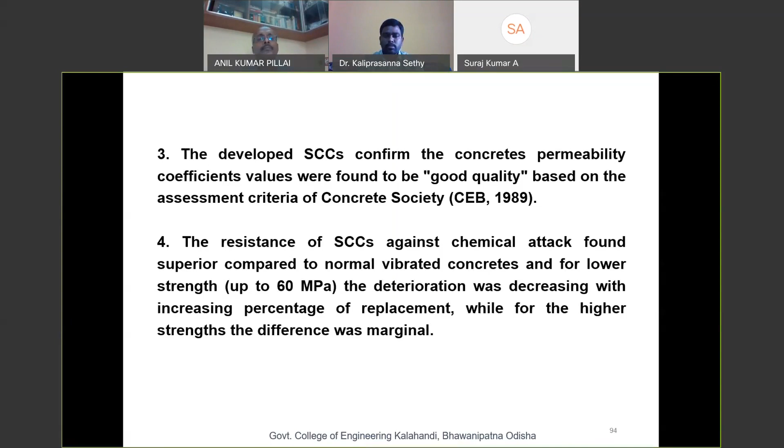And for lower strength, that is up to 60 MPa, the deterioration was decreasing with increasing percentage of replacement, while for the higher strength concretes, the difference was marginal. And self-compacting concrete that is designed with the proper mix design methodology exhibits a very good resistivity as per the ASTM criteria, and it also showed a very low chloride permeability as per the standard ASTM C1202-94.

The alkalinity, that is the pH value of self-compacting concrete, was not significantly reduced, even at levels of around 90%. A low strength concrete of 20 MPa with 90% replacement showed a very good pH value around 12, which was much above the threshold value for depassivation. And based upon the corrosion rates measured from the Tafel plots of potentiodynamic polarization studies, it can be said that self-compacting concretes are subjected to very low corrosion rates compared to normal concretes.

And finally, it can be concluded that the objective of this present investigation, the development of high performance self-compacting concrete using industrial slag, was achieved, as the efficiency concept could be used for the design of self-compacting concrete mix at any percent of replacement of industrial slag below the maximum possible limits presented. So this is all about my today's presentation.

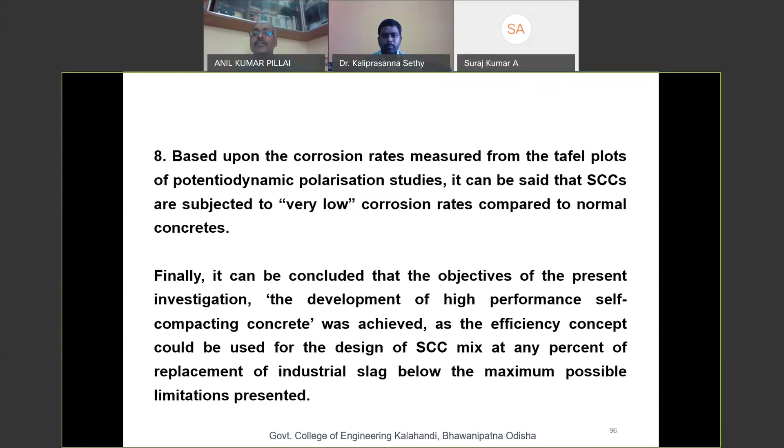In fact, there was one question from Professor Biswajit Jana. He was asking, in this presentation, development of SCC is as per EFNARC guidelines, that is European code. But why are we not developing SCC as per Indian code? Because now it is available in Indian code itself. Yes. IS 10262 is also giving some kind of guidelines in the latest amendment. Why are we not following those guidelines is his question.

Any answer for that? Sir, actually, this project was developed in the year 2012. And you know, there was no direct method to design self-compacting concretes as per Indian standards. True. There were codes only for manufacturing of cement using industrial slag or granulated slag, I think so. So that's why we have used the EFNARC guidelines for the development purpose, because it was at that point of time. Now we have it available in the IS code, because now they have given certain provisions for high strength concrete as well as for self-compacting concrete in IS 10262.

We can, yes. But the fact is that we can take any guideline as long as it is working, it is better. It's not like we should not follow Indian, or we should follow only that. Any guideline we can follow, and if we are able to get the results, why not follow any guidelines? Yes. Because all are based upon trial and error method. We have to test it in our laboratory. Then only we have to implement the mix at our site.